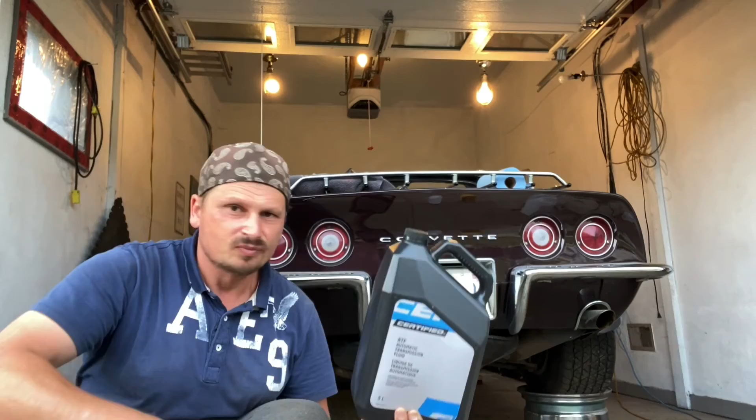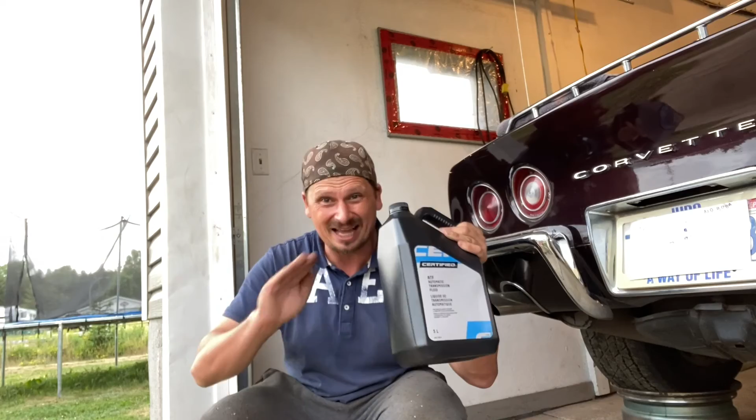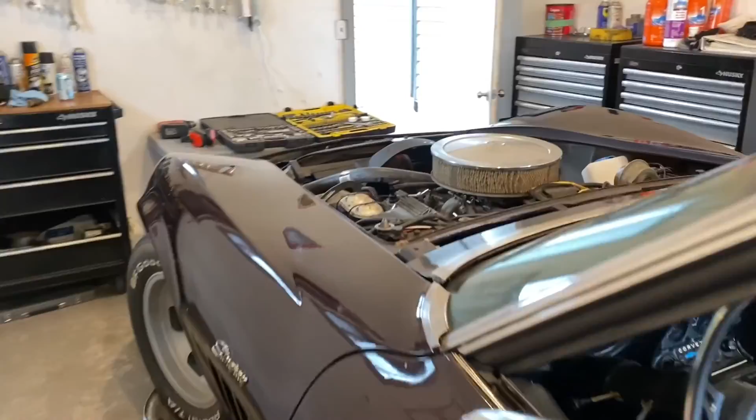In today's episode, I'll show you how to change all of your transmission fluid in your automatic transmission all by yourself. We're going to change 100% of it, not just a little bit. So in this video, I'll show you how to do this in basically any car.

We're working on a 1969 Corvette Stingray with a 350 and a Turbo 400 automatic transmission. But like I said, this works for any automatic car. The first half of this video covers how to change all of your fluid, and the second half gets specific to this Corvette, like what filter to use and how to identify which transmission you have. But you might as well watch the whole video because it'll give you a good idea of how to do it if you're working on a Cavalier, Sunfire, or whatever else.

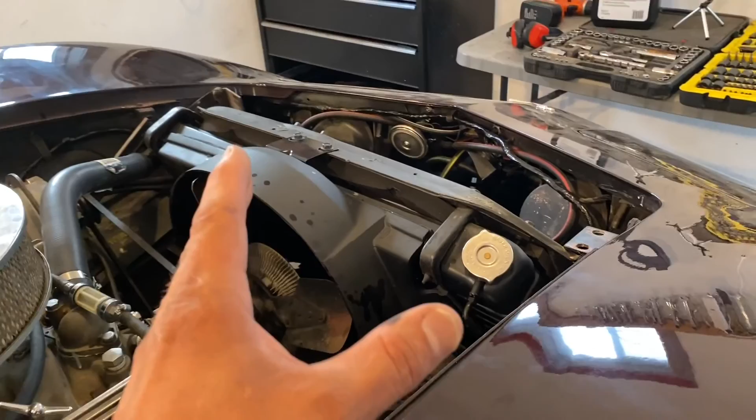Okay, let's get started right away. The first thing you have to do is locate your automatic transmission fluid cooler, which is usually inside the radiator. Sometimes they're on the front of the radiator.

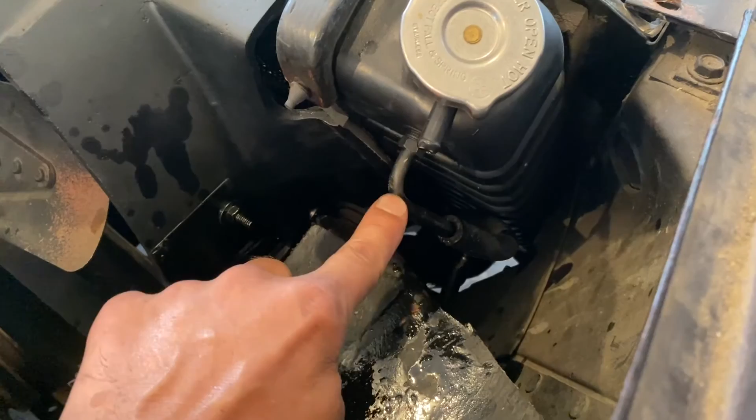The transmission fluid flows from the transmission into the bottom of the cooler, gets pumped upwards, and then pumps out through this pipe here. Then it goes into a rubber hose and back into your transmission cooled. So what we need to do is disconnect it right here. I already took the hose off the clamp, so we disconnect it — that's step number one.

Step number two, you're going to need an empty 4-liter container. See, we've got it marked right there at exactly 4 liters. I'm actually going to completely empty it out so we can see how dirty the fluid is.

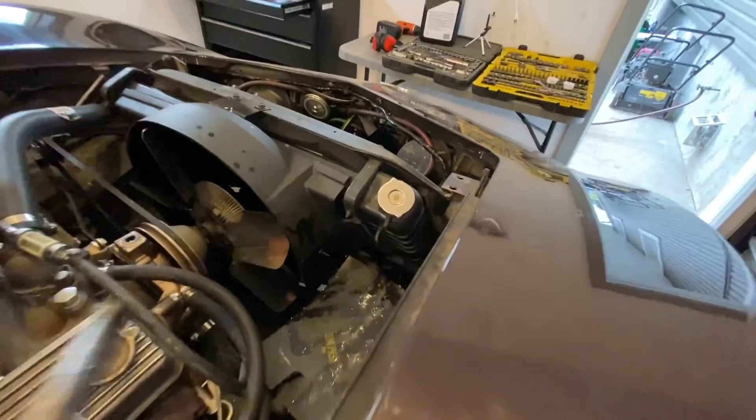Next, you're going to need a rubber hose like this one — the longer the better. We're going to hook this directly up where the fluid is going to come out. When we start the car, the transmission fluid is going to start pumping out right through this tube here, so we hook up our rubber hose to that.

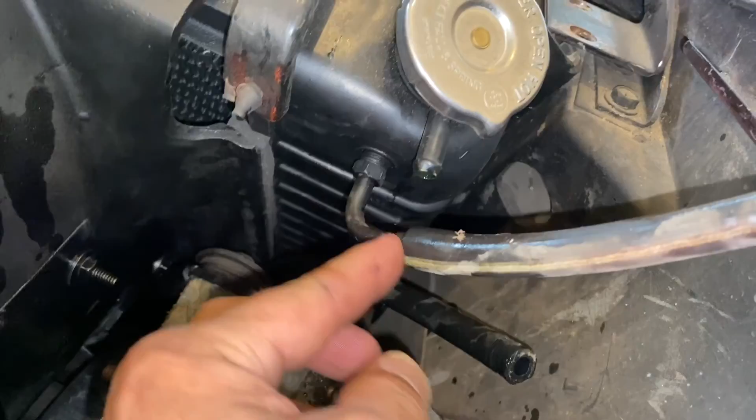So there it is set up — we've got it just hooked up like this, no big deal. That runs into this empty container here, and it takes 4 liters, so we know that.

Now your second hose — you've got to get a little creative here. This is your second hose, and this is where you're going to be putting your new fluid in. I'll show you how to do that.

Next you're going to need what's called a suction gun — see, it looks like this. What you'd use this for, for example, is you could put this inside of a differential and suck all the fluid out.

Or what you could do is open it up, pull this out, and fill it with transmission fluid right to the top — completely fill it — then close it like that. Now you've got full transmission fluid in here.

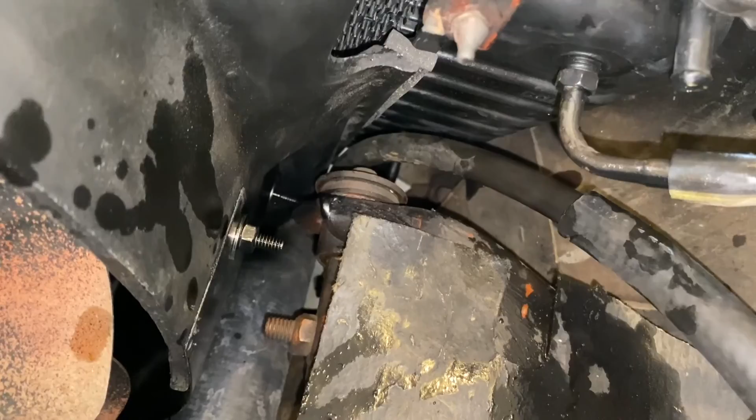Then you're going to hook this end up to that hose. You'll potentially need a bigger hose, since this hose basically has to fit over that one — look at the size difference here. So let me slide that on right now. Okay, here it is all set up — we've got this hose over top of that one, and the hose from the suction gun going inside of that hose. And boom, we're all set up.

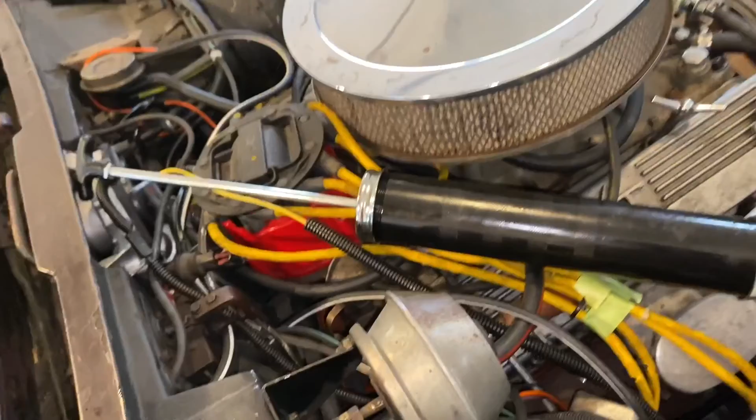Now what you've got to do, guys, is get yourself three 5-liter jugs of the correct transmission fluid for your car. Three of them should do it.

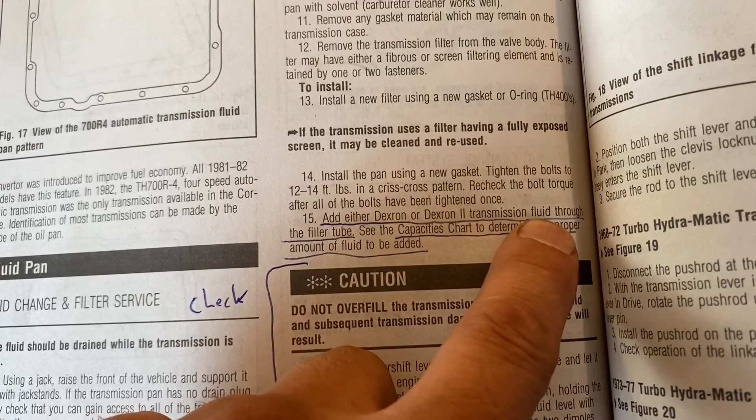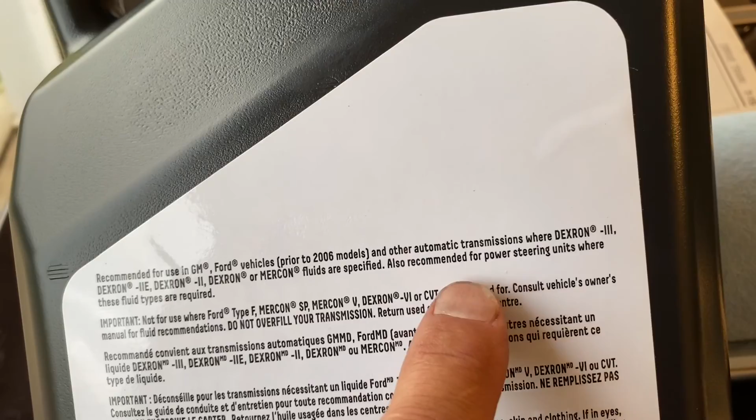In this particular car, it takes Dexron or Dexron 2 transmission fluid. Nowadays you'd just buy this stuff here, and on the back it tells you that this transmission fluid can be used wherever Dexron 3, Dexron, Dexron 2, or Mercon fluids were used. So this is the right fluid for us — this is what it has to say.

So now what we need to do is fill this thing up with the transmission fluid all the way to the top. We're gonna do that. And then we need a buddy to sit in the car and start it for us. He's basically gonna sit inside the car and turn it on.

And as the car is running, fluid's gonna start pumping out of here. So once it gets to a liter - 1 liter, 2 liters, 3 liters, 4 liters - you're gonna have to shut the car off because you're gonna have to refill your siphon gun, since this fits a liter of oil.

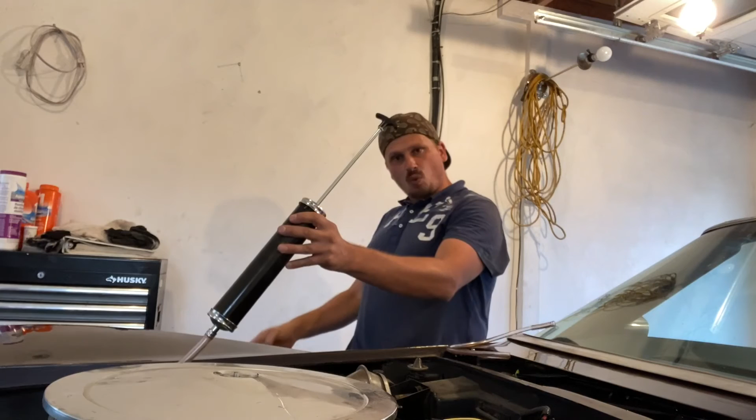So what you're gonna be doing is, as the car is running, you're gonna sit here and watch how much fluid is coming out and try to match that. You got a liter of fluid in here, so you're gonna be sitting here trying to match what's coming out. You get what I'm saying?

So once you get this right to the bottom, then you tell your buddy, shut the motor off. And he's gonna shut it off. And then you're gonna open this up and refill it. And we're gonna do that 4 times until there's 4 liters in that jug.

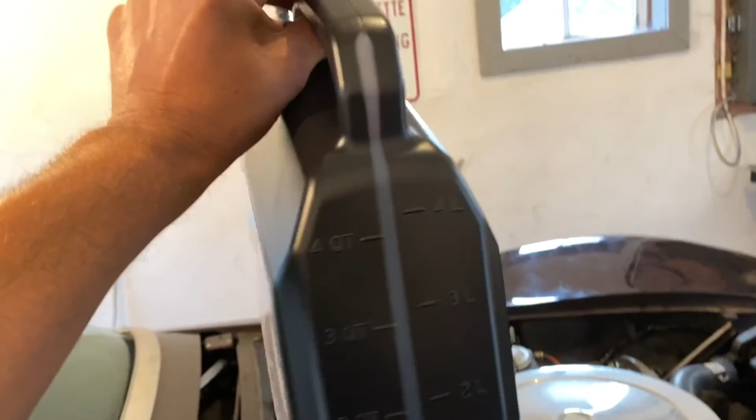This is a 5 liter jug, right? Until there's only 1 liter left in here. So that way, if there's a liter left in here, then 4 liters came out of here and went into the transmission - new clean fluid. And then 4 liters of dirty fluid came out and went into there.

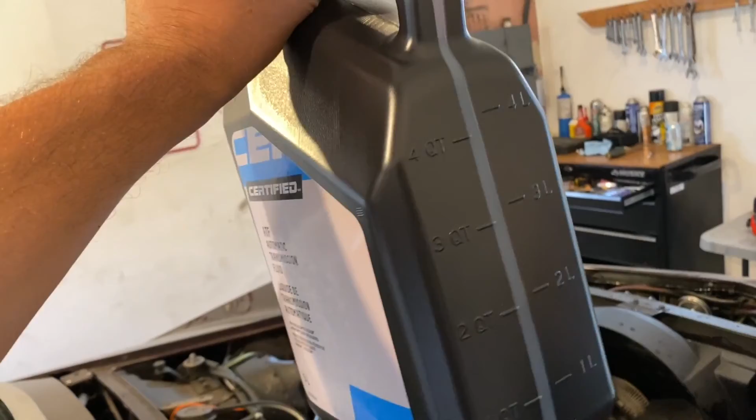So once we do that, once this whole jug is empty, we're gonna do another liter. We're gonna have to obviously empty that. You get it, right guys? Okay, let's do this. Okay, so the only thing I need now is a buddy to help me do this.

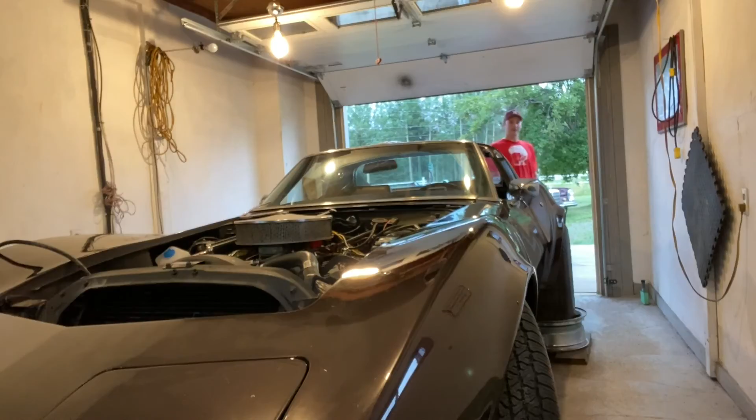Well, what are you up to, buddy? Not much, man. Perfect time. I actually need your assistance with this. Oh, great, great.

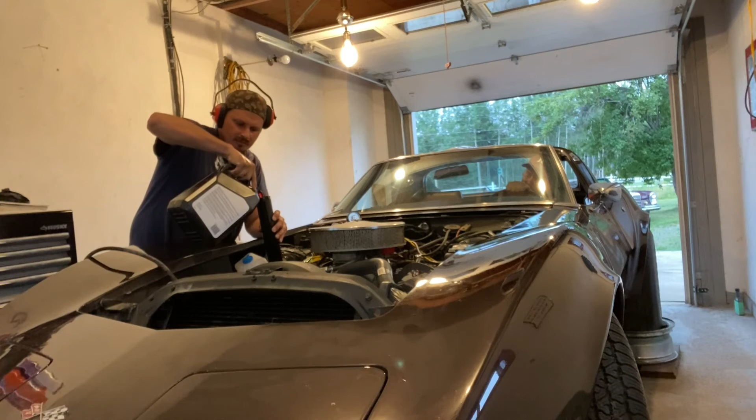Okay guys, so we're filling this thing up right now with 1 liter of the fluid, just like that. How much did that take? Yeah, it took a whole liter, so it takes a liter.

And if you don't know what a liter is, you can convert it with your phone. Just say, hey Google, convert the liter to pints or whatever you guys use over there. You ready, man, or what?

Yeah. Okay guys, so I got the fluid in here now, so what we gotta do is, it's gonna come out fast, so you have to really push this quick. Some cars, it just goes super smooth, and some cars, it's tough to push it. So, okay, I'm ready to give this a really good push as soon as the engine starts.

All right, start her up, bud. Okay, turn it off. Okay, 1 liter down, 1 liter came out.

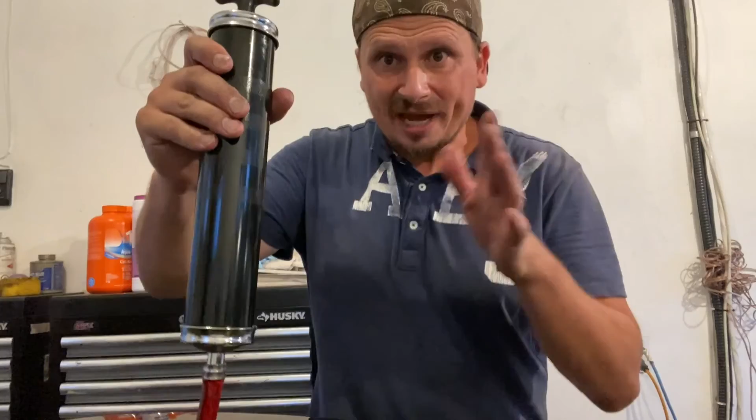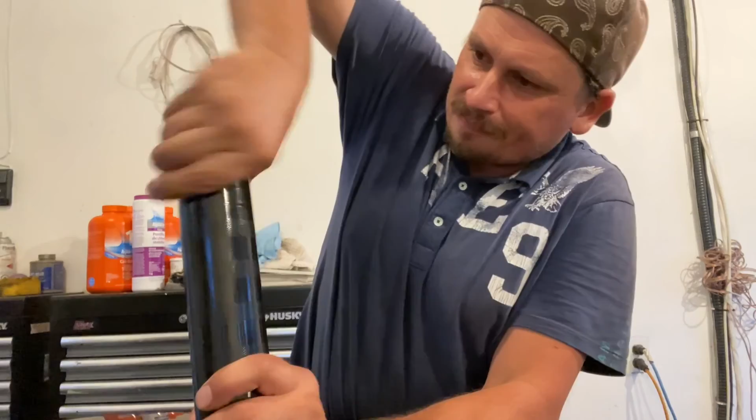Okay, so now that we got that first liter in, what you want to do is you don't want to just pull on this because then it'll suck the fluid back out. So you kind of open it - I mean, you could disconnect the hose here. That would be one way to redo it.

But what we're gonna do is open it up, and then as you're pulling this up, you kind of move it side to side and let air through. See? Just like that. See what I mean?

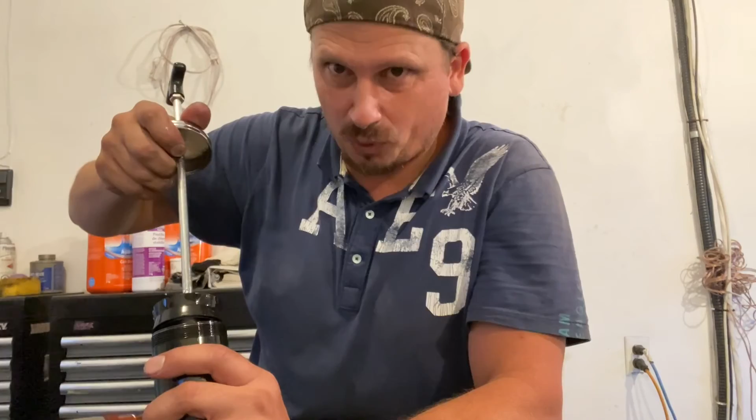Perfect. Okay, so now what we're gonna do, guys, is I'm gonna refill it. We're gonna do the same thing a few times, a liter at a time. Remember, you gotta push this quick. And then we're gonna get him to do the exact same thing.

We're gonna start it, but this time he's gonna put the car in drive. Get it? So it's gonna be in drive for the whole liter. You get what I'm saying? And then the next liter, he's gonna be in drive again. And then the next liter after that, he's gonna put it in reverse, and we're gonna do it.

And we're gonna do that with like 2 5-liter jugs, so 10 liters altogether, which is however many quarts or pints or whatever. Like I said, ask your phone to convert it.

Okay guys, so I'm ready here. So he's gonna start the car right now, and then put it into drive, and have it in drive for a few seconds, like 3-4 seconds. And then he's gonna put it into number 2, 3-4 seconds. Then he's gonna put it into number 1, and that's what we're doing this time around.

Okay, ready when you are, boss. Yeah, start her up. Yep.

Okay. Drive. Second. And then first. There we go.

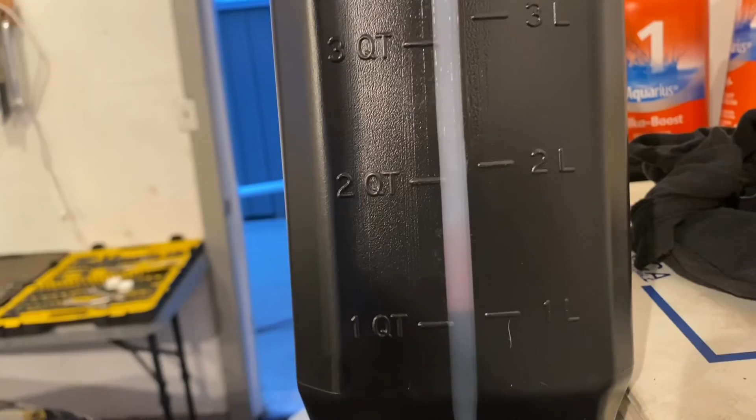Perfect. How'd that go? Good. Oh, thank God. Okay guys, so we got exactly 4 liters out of it. And I mean, it's dirty, as you can see. Pretty dirty, but it's still red and it doesn't smell, so the tranny's good. Okay, so now we're gonna start a brand new jug, and we got exactly 1 liter left in here of the good fluid, which means 4 liters went in.

So now we got a brand new jug, and we're gonna do it again. This time he's gonna throw the car into reverse, then into whatever. Neutral. Yeah, maybe neutral, but we got all the gears down. So we might do reverse for like 2 liters, and then we'll probably do drive again one more time at the end for 2 more liters. That should get it all out. So that's basically, we're gonna do 10 liters of clean oil in, dirty oil out. Okay, let's do this again, boys and girls.

Hey, stop. Okay guys, so we got exactly 5 liters in there, and we got exactly 5 liters out. It's going pretty good. So now we're gonna do it again. Like I said, we're gonna do half of this in reverse, the other half in first, second, third. And then we're gonna have a third 5 liter jug left, which we need 4 liters out of that for later when we change the filter. So we're gonna do another 2 liters out of that one, just to use it all up and clean this thing right up.

Okay, you ready, Ryan? Yep, I am. Okay guys, I'm grabbing a pretty thick book here, just so I can push this faster. Okay, ready? Start the engine.

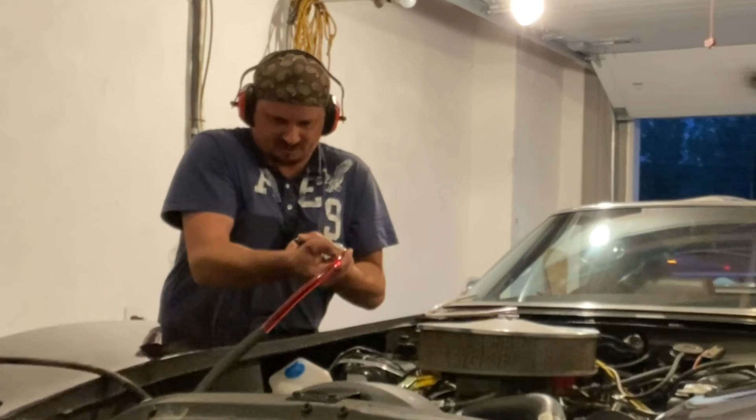Use the gas. Get her up. Beauty, yeah, that worked a lot better. The good old book trick. Plus, if somebody comes and tries to shoot you, this will stop a bullet.

That was good, that was good, that was really good. Okay guys, so we did it. We took 12 liters out, and we put 12 liters in of brand new fluid.

So at the beginning, when the fluid started coming out, I put a little bit into a cap. See right here, this is the fluid that was coming out at the beginning. The first 4 liter jug looked like that. The second 4 liter jug looked pretty close to this. And then by the time we got to the last 2 liters, look at the difference, guys. It is very, very clean now. So it's awesome, clean fluid in the car.

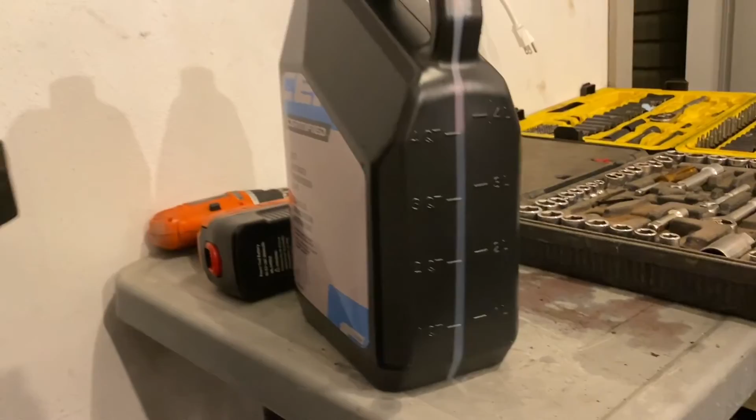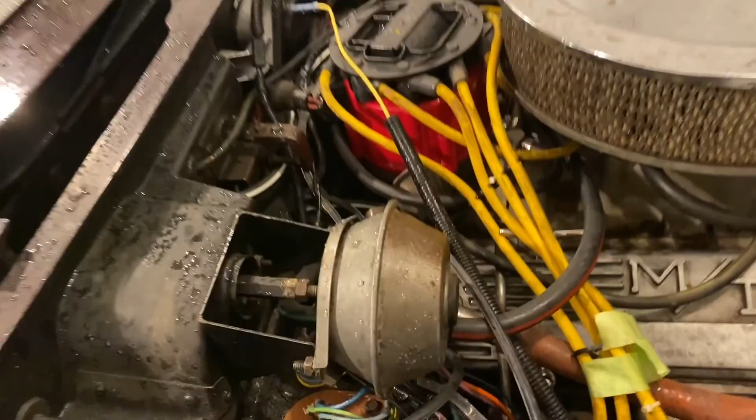So as you can see, guys, we have just under 4 liters left, which is what we need to change the filter. So now we're moving on to the changing the filter on the transmission part of this video. But first we're gonna check the transmission level. In order to check the transmission fluid level, the car has to be running. There's the back of the car, and right here is your transmission dipstick. So we're gonna check that.

Okay guys, it is hard to see, but it's actually right up to this add mark. So it's right there, but the fluid is cold, it expands when the engine's hot. You're supposed to check it hot. So by the time it gets hot, it'll be right in between these 2 lines. Once we drive it, we're obviously gonna check, maybe we have to add a little tiny bit. The crucial part is not to overfill it, that's the most important thing. So we're right where we were. We took out 12 liters, we put 12 liters back in.

One last thing I want to mention before we move on: when you're putting the hoses together to get the fluid in and out, maybe put some clamps on it, because when you're pushing on that siphon gun thing, it could pop out and you could have a big mess happen. So just in case, maybe throw clamps on it, it'll make things a lot better.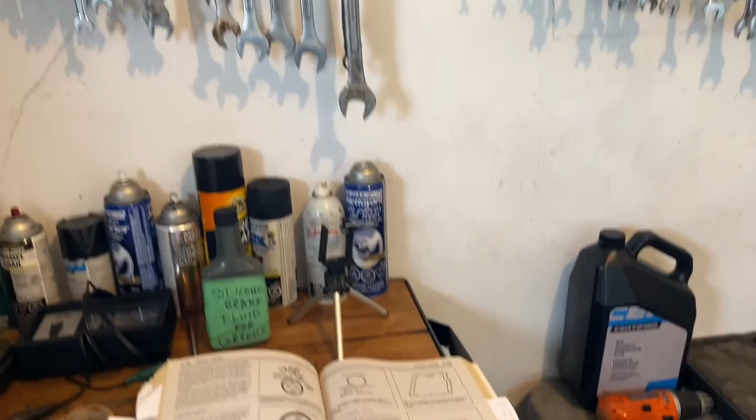Okay, we're moving on. Okay guys, it is day 2. We're moving on to changing the transmission fluid filter, that's what we're doing in this episode. So first thing, guys, you need to identify your automatic transmission. Here are the 3 transmissions that the Corvettes came with.

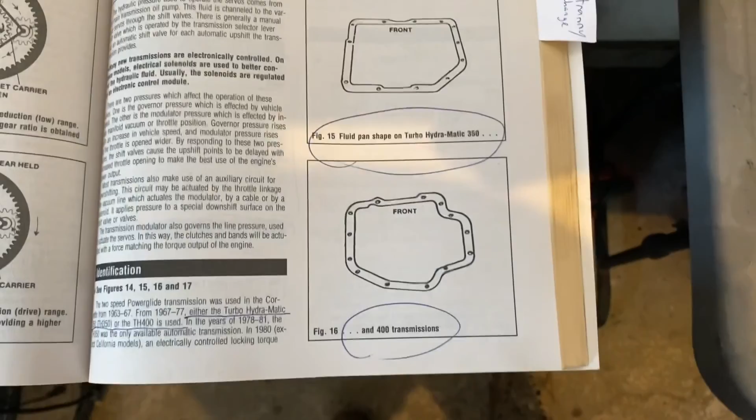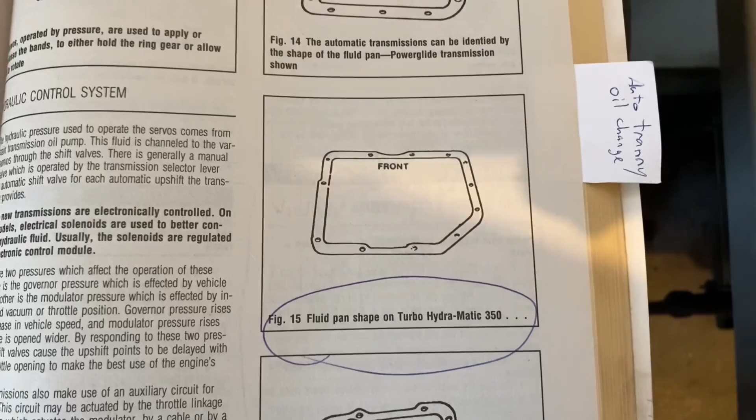So you've got transmission number one. You go underneath and look at your pan. This is the Powerglide transmission. This one here is the Hydra-Matic 350, and this one here is the 400 transmission.

So you basically go underneath your car. There's the front of the car. You look at your pan here and the shape of it, and out of that book, we know we have a 400.

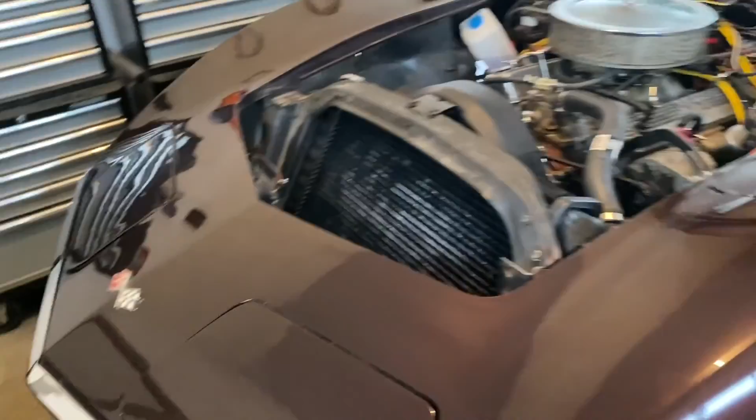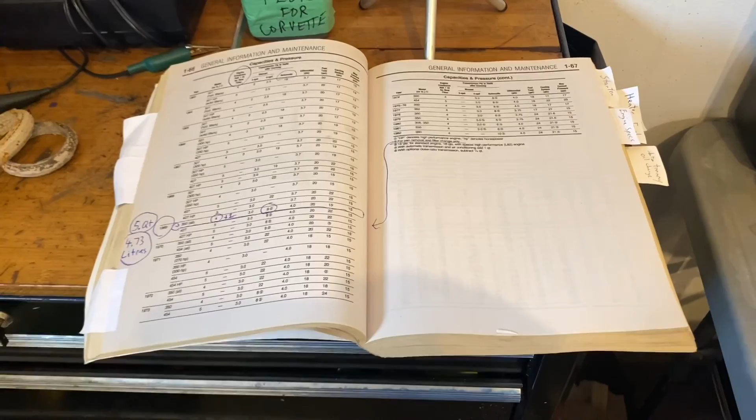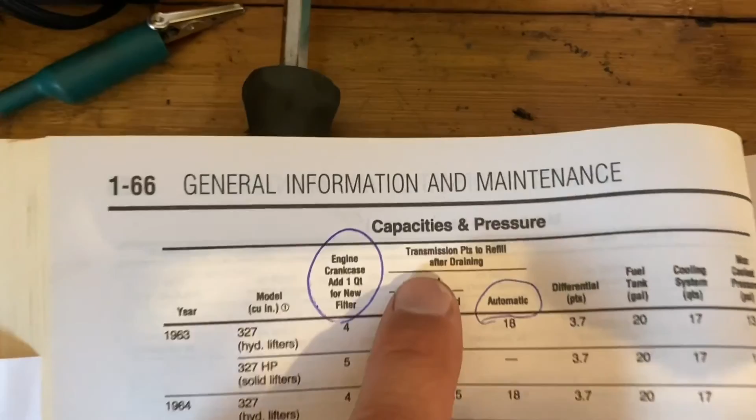Now as far as how much transmission fluid you will need, I'll show you how to read these books because it's kind of important. Up here it says you always have to read all the little stuff. It says transmission pints to refill after draining.

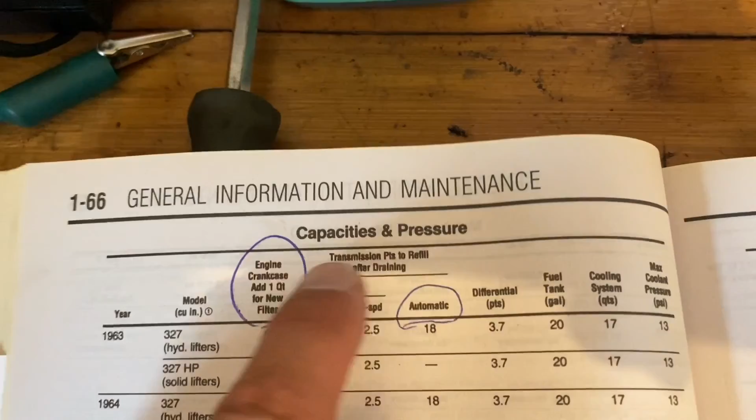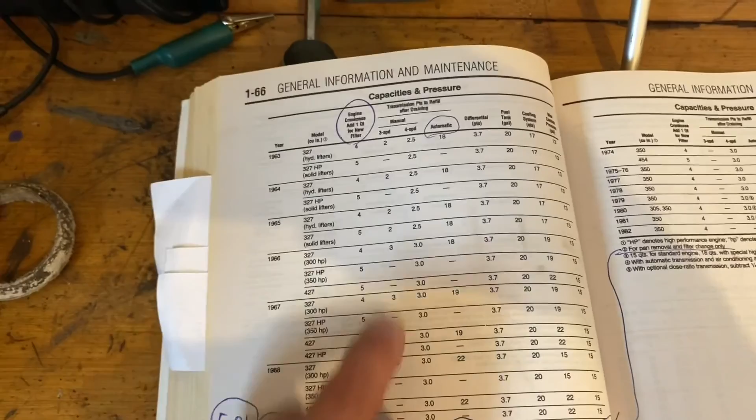So that means pints. You go to automatic, that would be your transmission, then you find your car specifically, your years and stuff. Ours is a '69 with, it says, all 350s. There's your engine amount, and right here is our transmission amount. So it takes 8 pints.

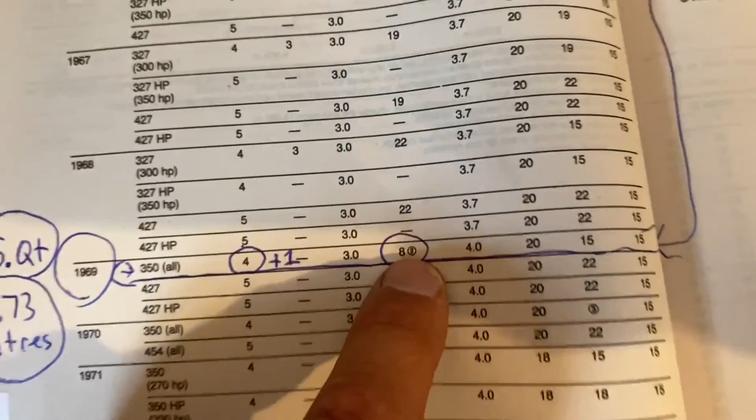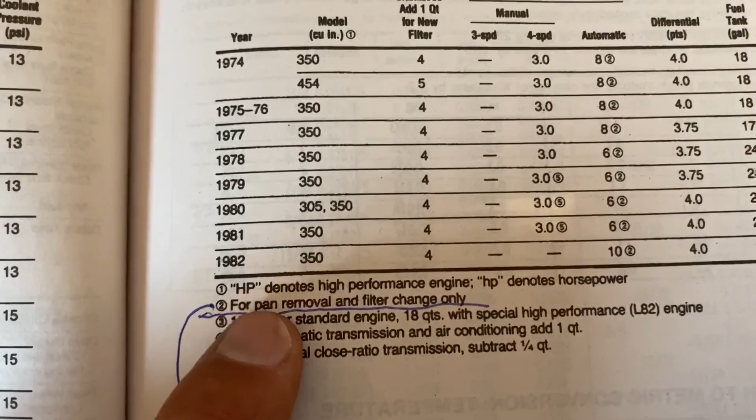And there's a little 2 behind it. Whenever there's a little 2, like I said, you have to read all the small stuff. Anything with a little 2 beside it means for pan removal and filter change only. So if we remove the pan and change the filter, whatever drains out, we're going to have to refill it with 8 pints, not quarts, not liters, 8 pints.

Now in order to convert that, it's super duper easy. You just ask your Google box or Google Home: Hey Google, convert 8 pints to liters. 8 pints is equivalent to 3.785 liters.

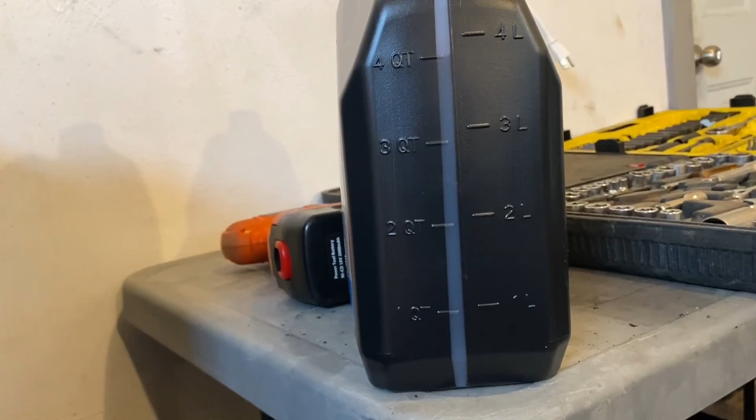Okay guys, so there we have it. See, on this side are the liters of the transmission fluid, so we're just under 4. This should be the perfect amount once we do the pan.

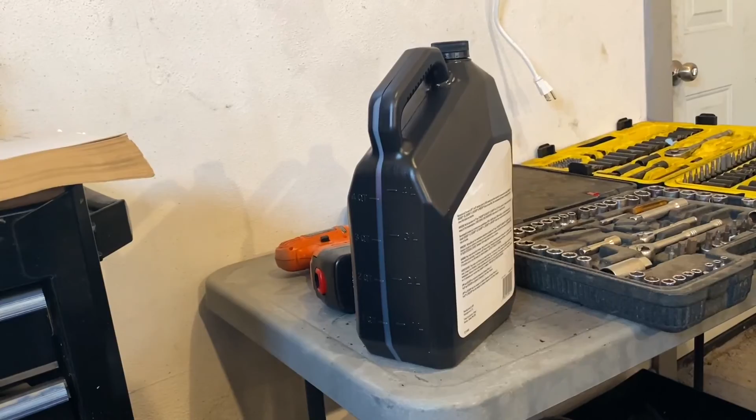Let's get underneath the car and I'll show you how to get the pan off. It is a little complicated on this one.

Okay guys, so we're underneath the car and there's bolts on this pan. We have to basically remove this pan in order for the fluid to come out. This exhaust seems okay on that side, but see this one here, none of this is right. Obviously our next episode is going to be an exhaust episode.

Also, this hanger is broken on the end, so we're going to be changing this hanger in the next episode as well. Plus none of these are tight. I can actually spin this whole pipe. Look, it does spin. Yeah, look at this one.

So anyways, we're gonna have an exhaust episode, guys, but for now I think I can get this pan off. This is kind of close, but we should be able to push the exhaust out of the way like this. Okay, so I'm gonna start by unscrewing these bolts.

Okay guys, figured it'd be worth mentioning. I loosened this clamp that doesn't belong here. See what I mean? That hanger is busted, which pulled the exhaust right over top of this. So in your case, you shouldn't have to do anything with the exhaust.

Okay, these are all half-inch bolts. We're gonna start pulling them off. Right here you've got the shift linkage attached and there's some kind of little plate there, so you just gotta remember what goes where. You don't want to mess anything up.

Okay, let's start unscrewing this right now. And yes, you're gonna have to get a pan ready so you can put it underneath, because oil's gonna come out everywhere. It does get messy, guys.

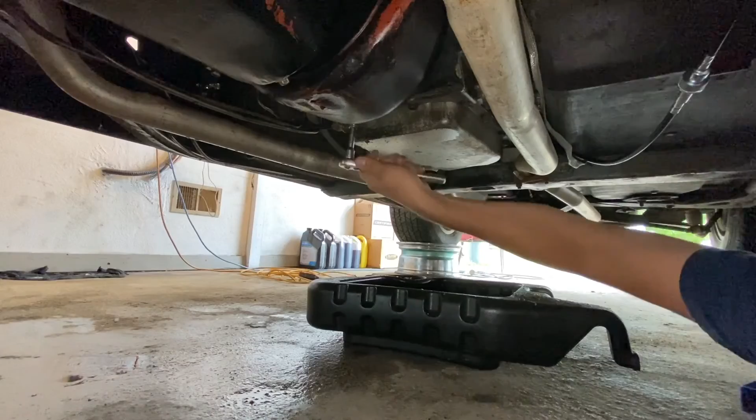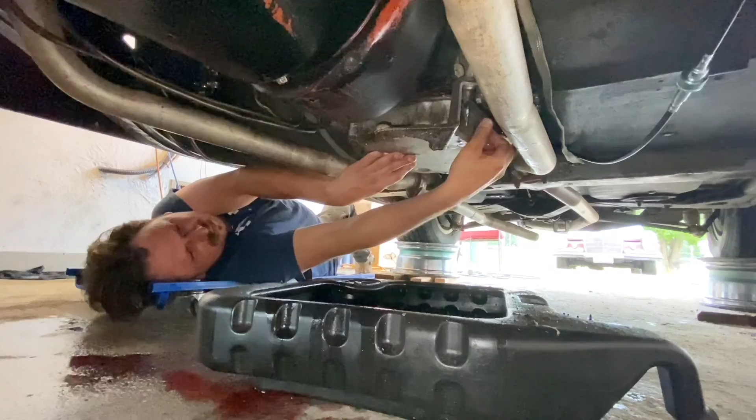All right, there it goes. Told you it'd be messy. Shifting linkage out of the way. Okay, we got her exposed.

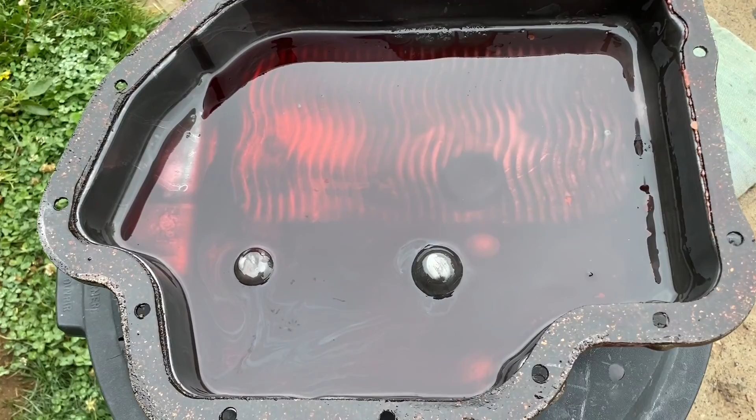Okay guys, so there it is. Here's our pan. As you can see, this is why I like changing my own oil, because at some lube place, do you really think they would clean this? The oil is clean, especially since we changed it, but see, there is, you know... right? You get what I'm saying?

So you're basically gonna take some rags and clean this, wipe it all up. You're gonna clean it with a garden hose towards the end because you don't want any lint inside of there. Those can get into your transmission. Okay, I'm gonna clean this pan right now. Step number one.

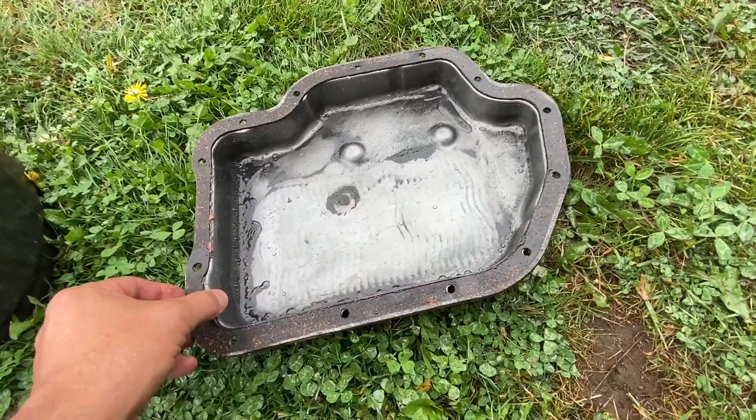Okay guys, so you're gonna have to get the gasket off. You might have to use a razor blade, who knows. Don't just throw it out right away in case the new gasket doesn't fit or something. You could use this as a template and make one. So keep it for now.

Also, it's this black stuff here that's what you want to get rid of. So we're gonna clean this thing spotless right now. You get the idea, so we're gonna clean it. I'll even use dish soap if I have to, as long as we rinse it off super good at the end, so there's absolutely no soap on it.

Okay, I'll do that off camera.

Okay guys, so this is what a pan should look like. There's no way any lube place anywhere in the world would do this. They would just change the filter and put it back on. So that's what you got to do, guys.

And now in order to dry this, we're going to use a hair dryer so we don't get any lint on it.

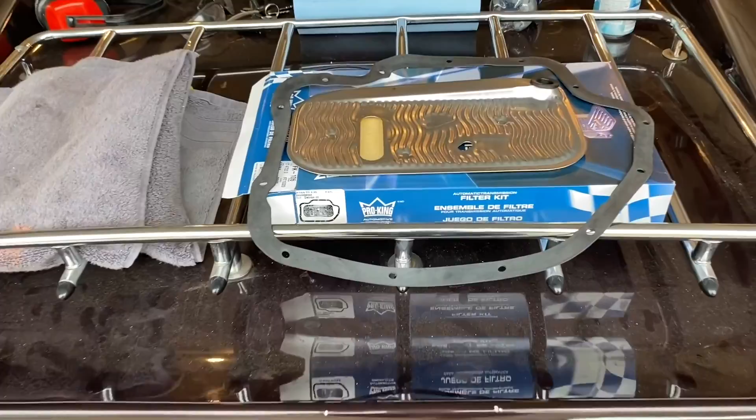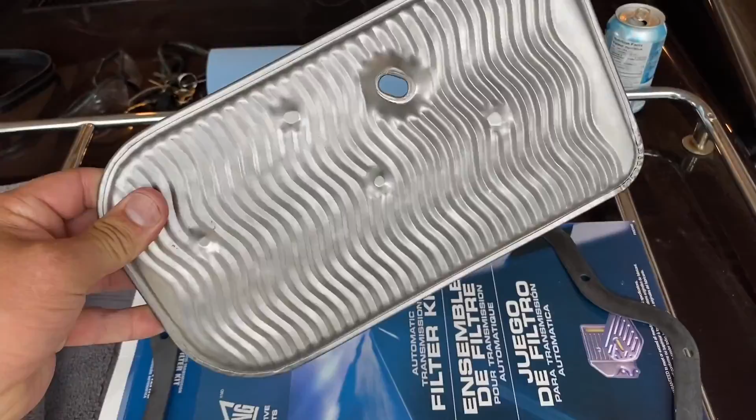Okay guys, so here is our new filter kit. It comes with a new gasket, as you can see, and it comes with a new filter. So it's a good idea to get yourself familiarized with this, so when you go underneath, it's easier to pull the old one off.

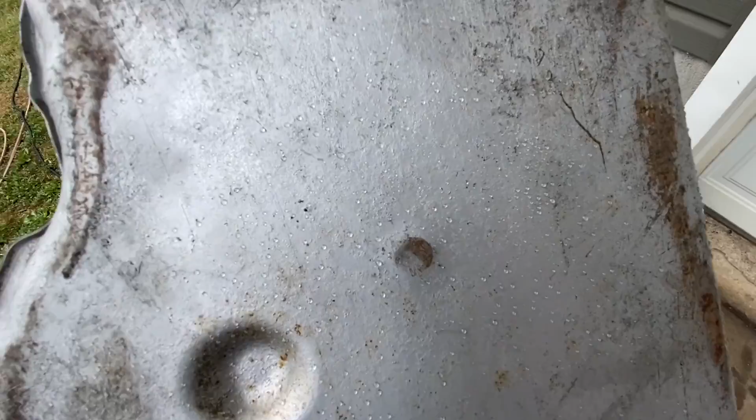Okay guys, so I noticed on the pan, see there's like an indentation there. It's all the way through, see? So let me show you underneath the car.

Okay, so see underneath the car, there's a bolt here. It's a 1/2-inch bolt that needs to come out in order to get this filter out, but look.

I think this bolt might be too long because when we put the pan cover on, it was literally pushing on it. That doesn't look right to me.

So, I mean, it's got to be like that. I don't know if it's got to be all the way. Probably not all the way. That doesn't seem right either. Okay, anyways, we're going to pull it off and investigate this.

Okay, and then this should just come up.

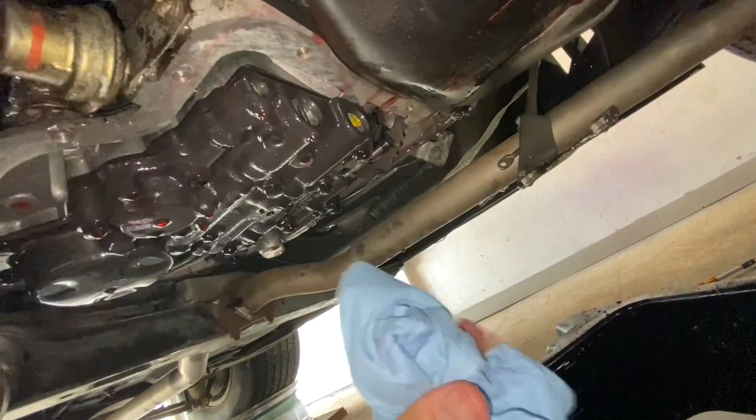Okay guys, so now that we got this thing opened up like this, you get a rag, and be careful, but you gotta basically wipe all this outside area here like so. You're getting all the oil or transmission fluid off of there for where the gasket's gonna go. You're checking, making sure there's no weird imperfections or something. So I'm gonna go around and clean this thing right now.

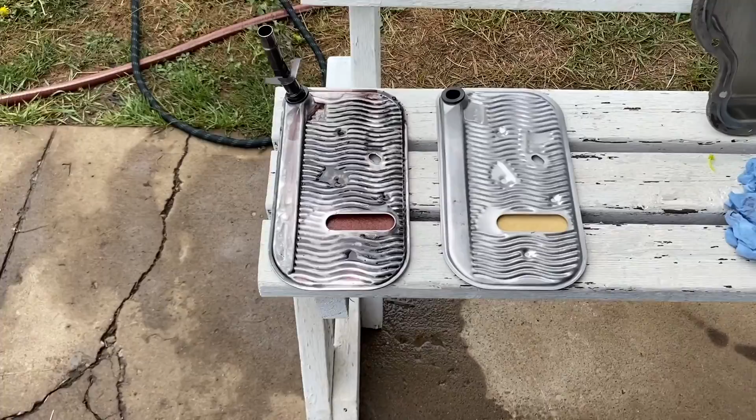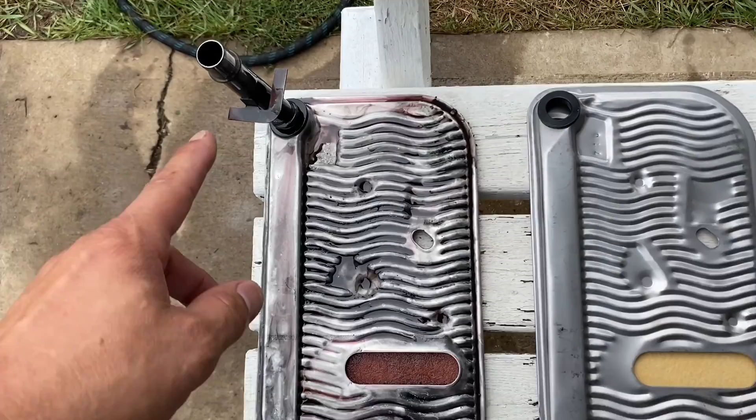Okay guys, so here they are side by side. As you can see, it was time to change it. A lot of dirty stuff in there, especially the 30-40-year-old fluid, who knows how old it was. So we're gonna pull this guy out and we're gonna put him in here.

I looked inside the transmission and there's like a rubber O-ring, kind of like this one that it slides into. Everything seems fine there. So we're gonna put this onto here and then we're gonna go slide it in the car. Also, I investigated the situation with this bolt and it actually does look right to me.

I believe that that's right. I don't know why it's pressing. Maybe it wasn't screwed in all the way. See, if you put that in like that, it's doing what it's supposed to be doing.

That bolt just prevents it from turning, but the pan is what actually kind of holds it in place. So one thing I was thinking of doing is I'm just gonna grab a grinder and take off a little bit. I'll do it right now and I'll show you.

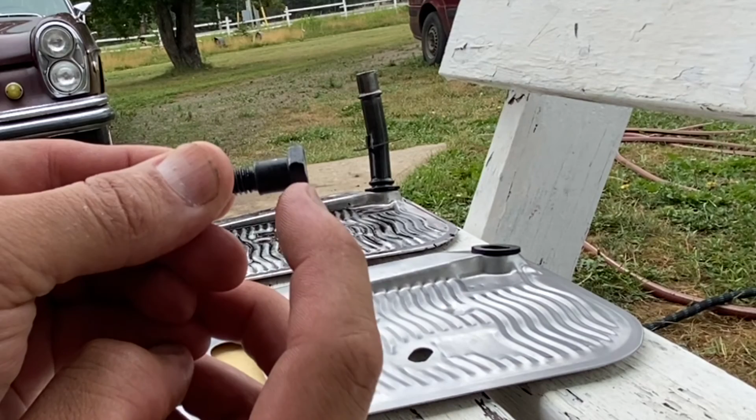Okay, so see what I did? I just took off a little bit off this bolt off the top to make it a little bit skinnier, basically by the amount that it was pushing on. Sometimes what can happen, guys, these aftermarket gaskets might be a little bit too skinny or something, so that should make up that difference.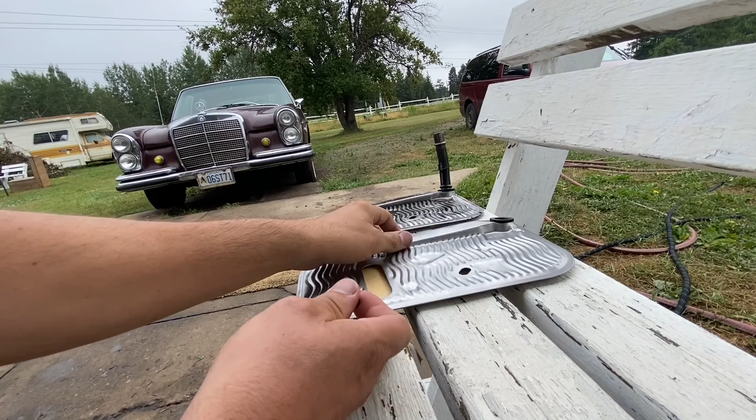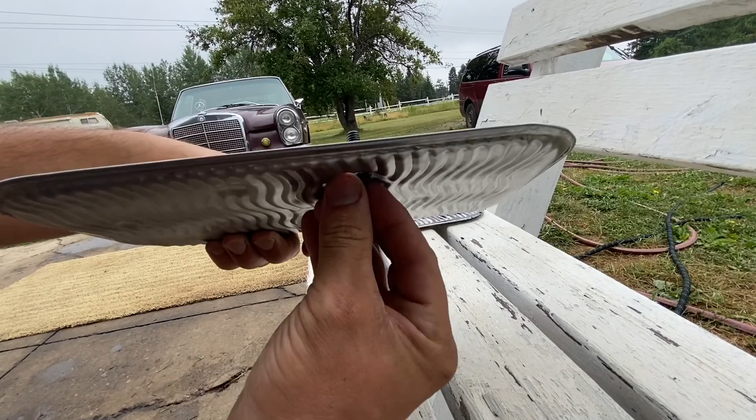Okay, so now, the way this works, this just kind of goes in here like this, see? And it just prevents it from moving side to side or whatever. It doesn't actually hold it. It only holds it until you put the pan in.

So I believe this is correct, especially now. Okay, let's go put this on. We're gonna just transfer that first.

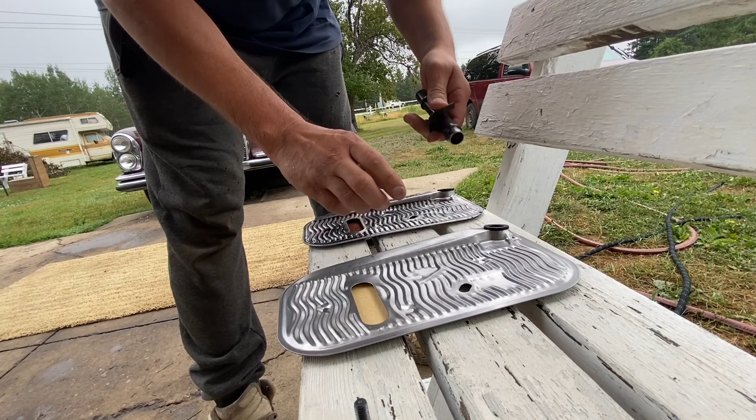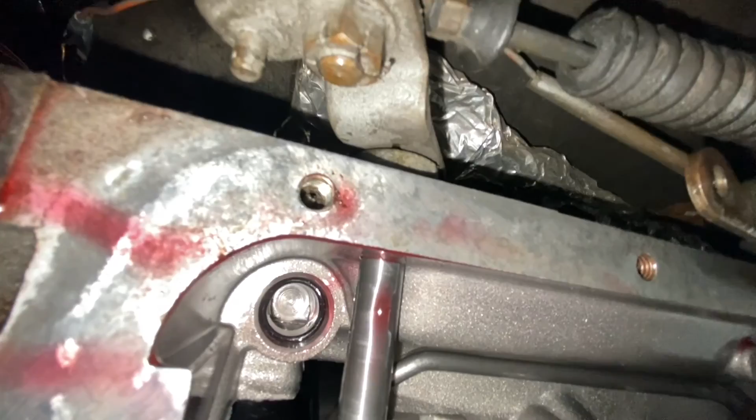Okay, so this part, I'll show you where it goes and what you should check for. A good way to do it is to use your phone with the light on, so you can see right inside that hole. See, there's an O-ring and it's in place. You want to make sure that O-ring is in right, otherwise if it fell out, that would not be good.

Okay, let's put this in. Yeah, perfect, pops right in, no problems. Now for this little screw, or bolt I should say. All right, that's that.

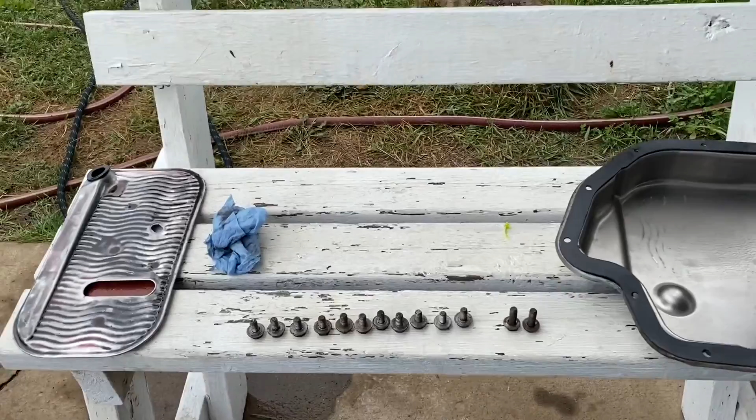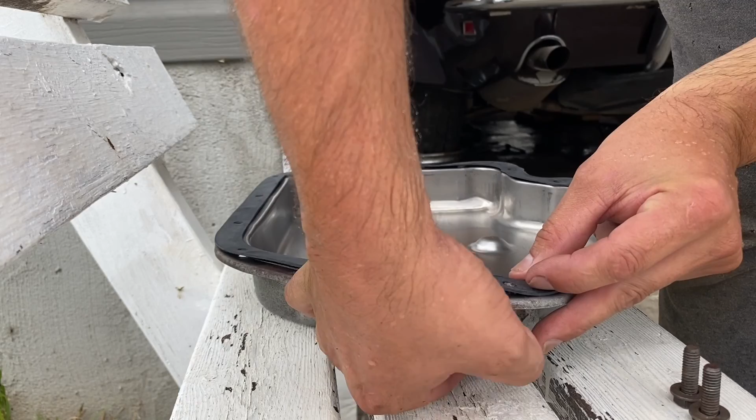Okay guys, next we took all these bolts and washed every single one of them so they're nice and clean. Two of them are longer, I'll show you where the longer ones go. So you place your gasket on top, it doesn't call for any kind of sealer. Then you just put a few of the bolts in like this, just a few, and that keeps the gasket in place. You could do two here, one on each side, and two in the back. That should do it.

You know what, these are actually going in so nice, I'm gonna put them all in. So these two are the two longer ones right here, they go there. The rest are all the same length. Once we're underneath the car I'll show you better. So let me put all these in just a little bit. I'll do every one, even the long ones.

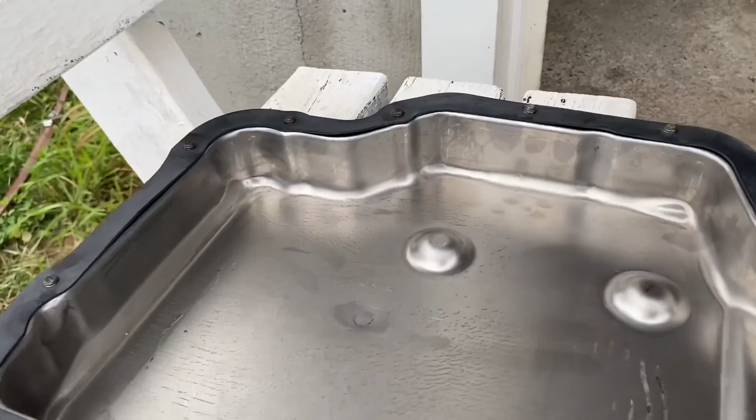Okay, there it is, let's go put it on. Okay guys, here it goes. So you gotta move the shifter linkage out of the way, and this thing which controls so you can't put the car in neutral when there's no key in the ignition. So those things are out of the way. All right, let's put this thing on.

Really nothing to it, you just gotta be good at aiming. Okay, and then you gotta grab one at a time. That's that. So you're gonna go around and get these all finger tight. I'll do that right now, one at a time.

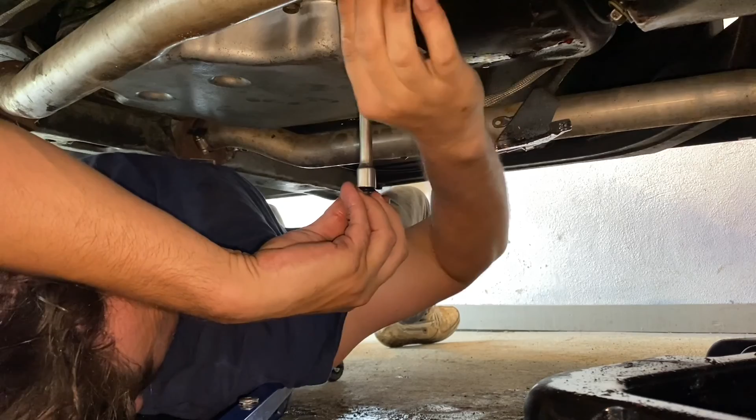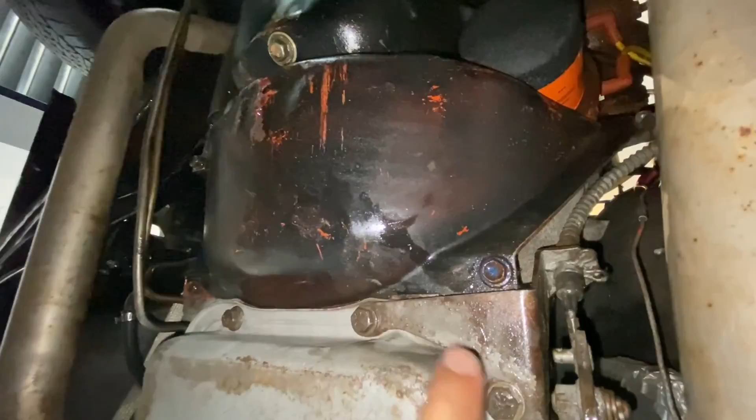Okay guys, so we got all the bolts on. I did make one little mistake when I was telling you guys outside. The two longer bolts go right there in that corner, I said it was the other corner by accident. Okay, so now you're gonna go around and slowly tighten them tighter and tighter in a cross pattern, like you'd go that bolt, that bolt, that bolt, that bolt, you know what I mean?

So anyways, you do that and they want these tightened to 14 foot-pounds, between 12 and 14 foot-pounds. But you gotta recheck them like 10 times, because each time you tighten the pan, if you tighten those bolts, the other ones will get loose again. So you have to go around in a cross pattern many times. Okay, I'm gonna tighten that right now.

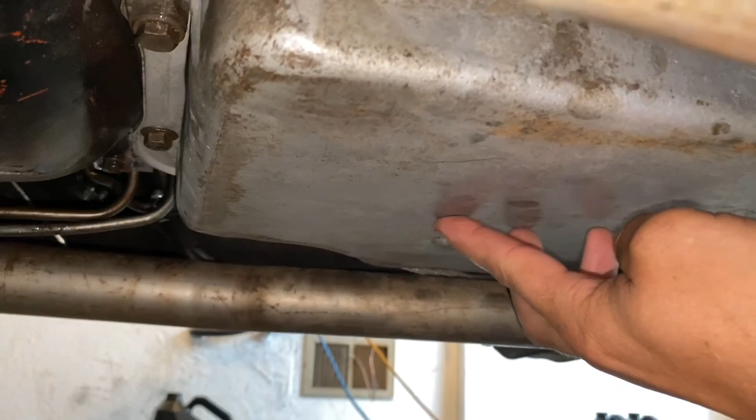Okay guys, so we're all done down here, everything's nice and tight. Oh, so with that bolt I can actually move this whole pan a little bit, see? So it's not touching there anymore, so that part's good too. I'm thinking that gasket was just too skinny, or maybe that bolt wasn't screwed in all the way, but it felt like it was.

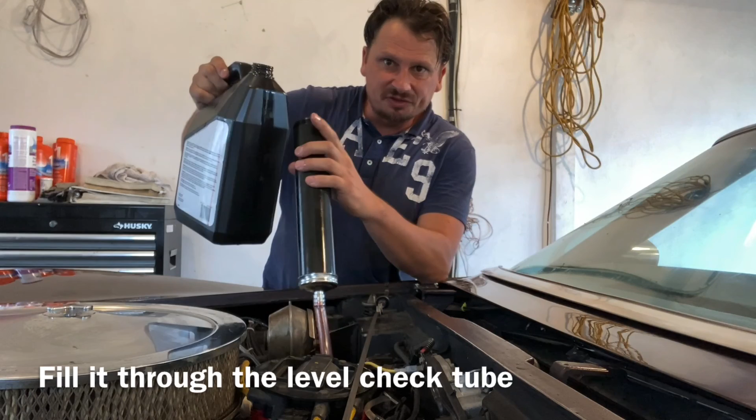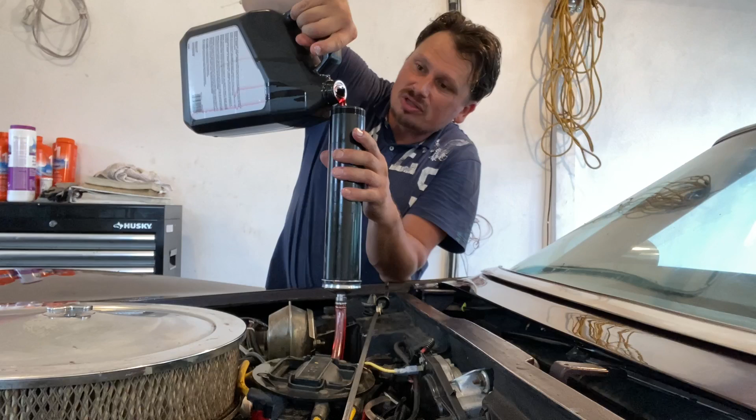Okay guys, so I got almost the whole thing going in. The only thing I'm gonna do is put a little bit less, so I can start the car and check it, because it's a lot easier to add some than it is to pull it out. So I'm gonna put like a quarter liter less, and I'll just remember about that. And that is that.

Okay guys, I actually was planning on doing the differential as well today, that will be an episode coming up. Also there'll be an exhaust episode coming up. I'm also rebuilding the carb, so there's lots coming guys, so don't be scared, possibly even doing the brakes. I opened the master cylinder and it was completely empty. So we got lots coming, guys.